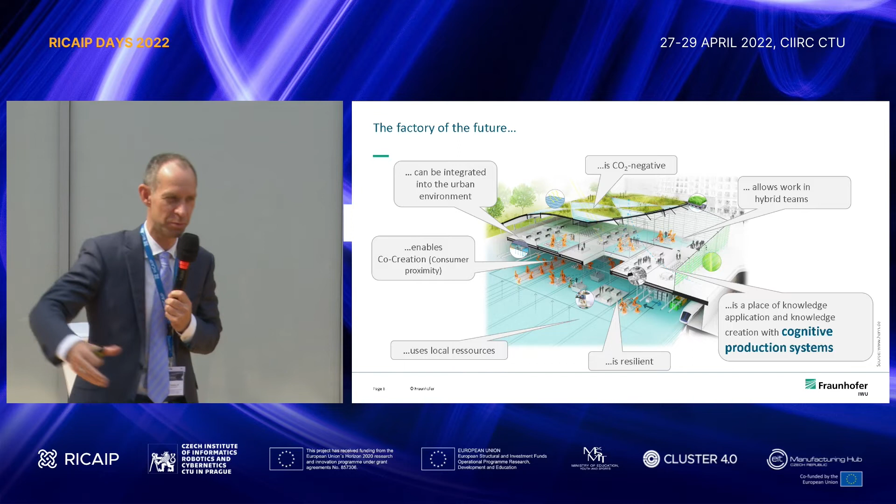The topic today is the factory of the future is not just producing products, they also produce knowledge. This is what we already talked about the whole day today, and that's why we call it cognitive production systems.

When we compare human beings and machine processes, we have lots of interactions and the same idea. So we have this self-reflection. We work in an efficient way. We want to do it independently, and of course we are able to adapt to changes in the process. This is what we have to link also to the production of the future.

So when we say how we can do this, what are the technical cognitive systems, we find lots of things. For example, we have to develop dialogue systems between human and machine. We need machine-readable self-optimization strategies. Of course, we need self-description, which we already have solved with, for example, AAS and so on. So some of the topics we already have done, some we have to develop in the future.

And so we have created an idea of human cyber-physical production systems. We have to combine the technical cognition and the knowledge from the worker, the knowledge from the developer of products. This is what we have to bring together in the next step. This could also be a part of the next 10-year topics.

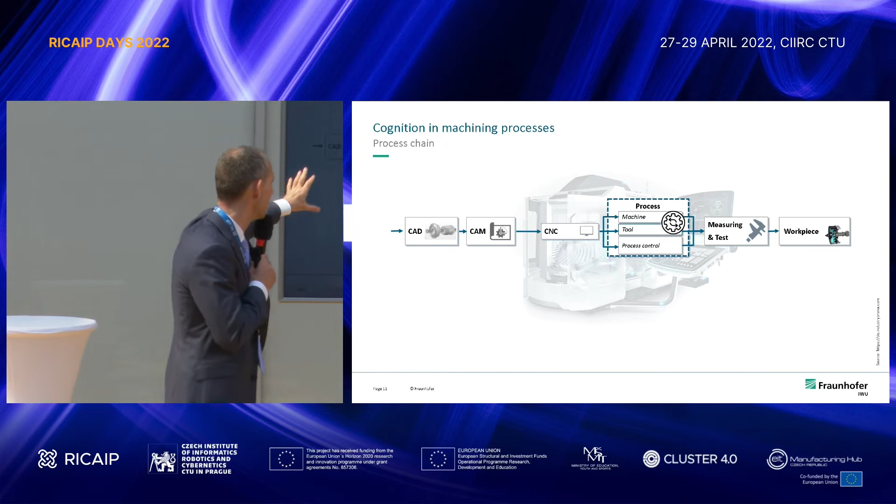And I want to show you some results, what we already solved in the process chain of machining processes. So normally we start with CAD, CAM system, CNC. We have the process with machine-process interaction. Then we have the measuring, and then we have the workpiece. This is the process chain we already have here.

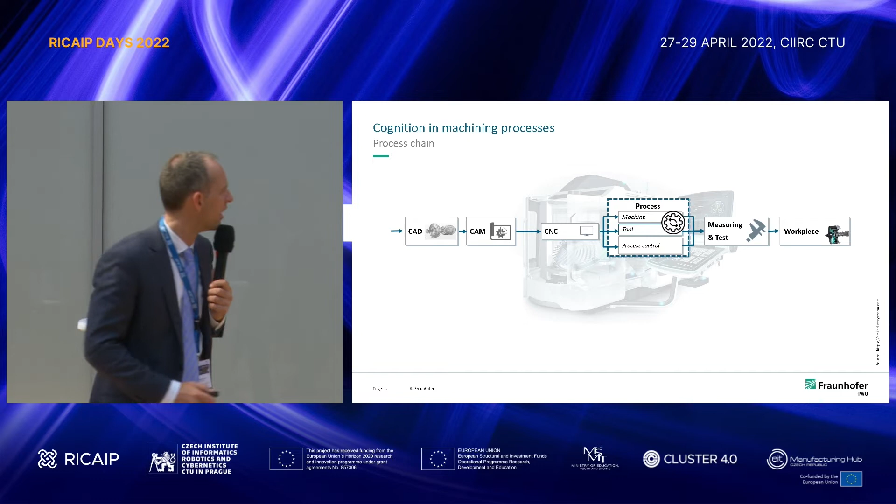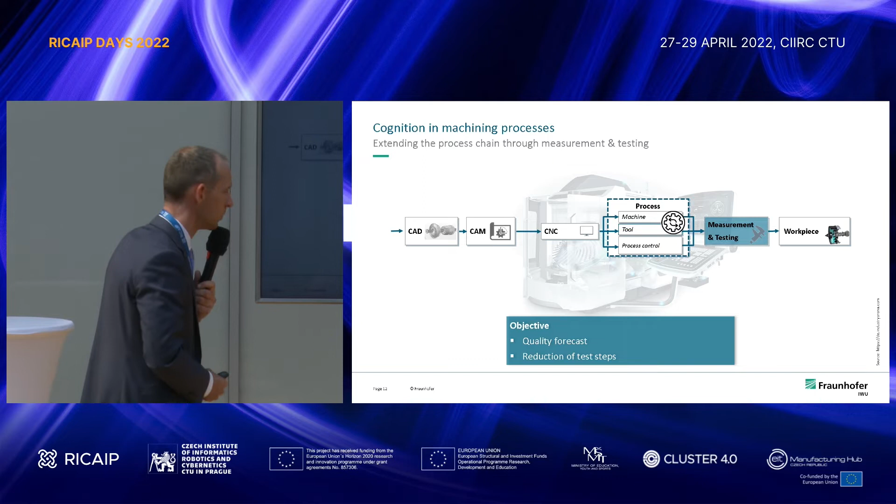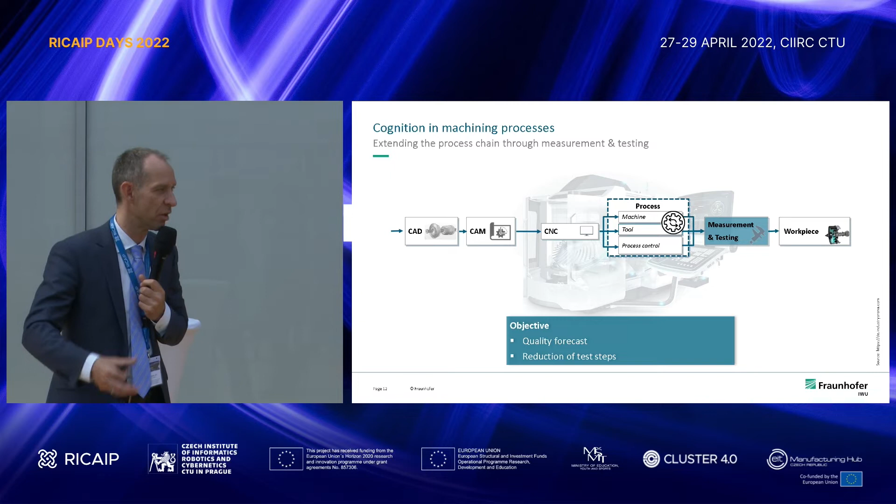And what we realize is, of course, a quality forecast when we want to close the loop. So we don't want to have a measurement device at each step. Sometimes it's good enough to have the sensory data and the knowledge, and then we can do a forecast for the quality, and this reduces also the effort.

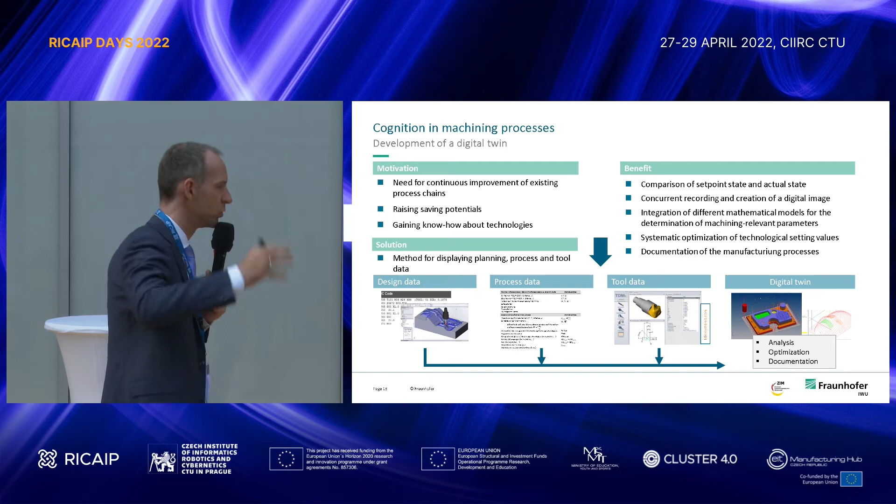For this, you know, there are different definitions of digital twins, and one is that we use the data from the machinery, combine this with physical models, and then we can predict the quality from the part. We are working on implementing this especially for serial production now, and in the future for single part production. This is what we are working on, and for this you need all the topics: which data you need, can you compress the data, which information you need from process planning, which information you need from logistics and so on - all this we have to match.

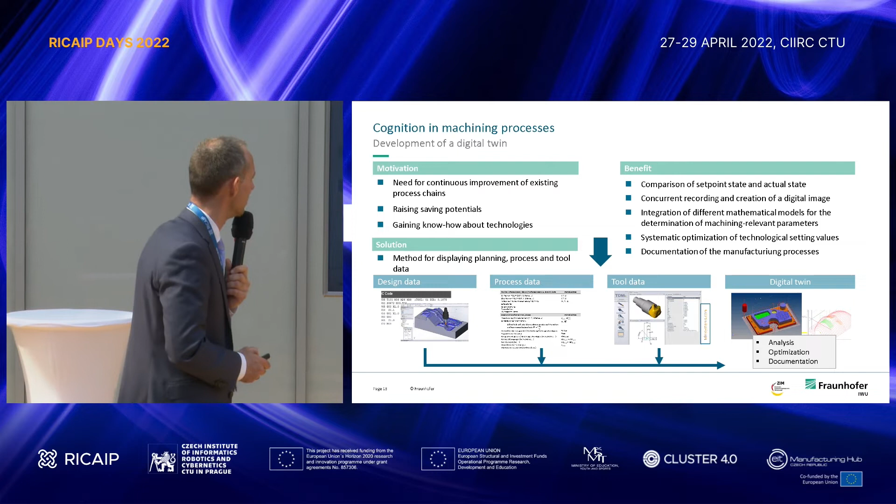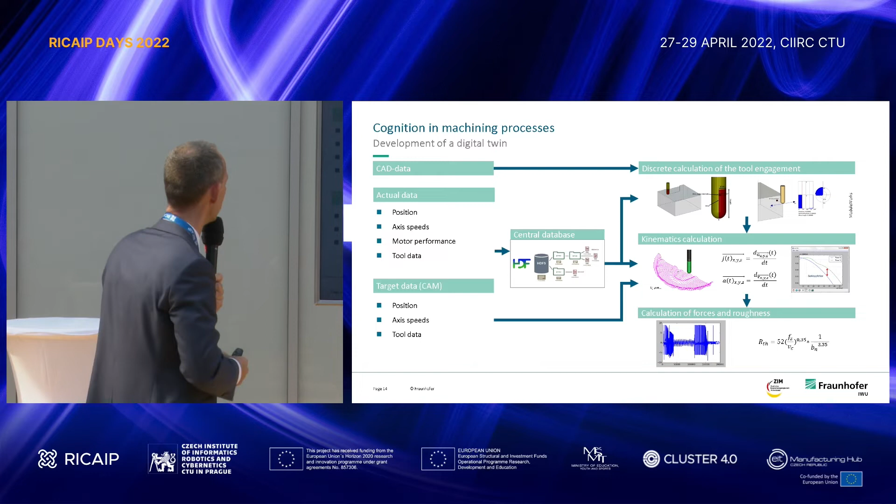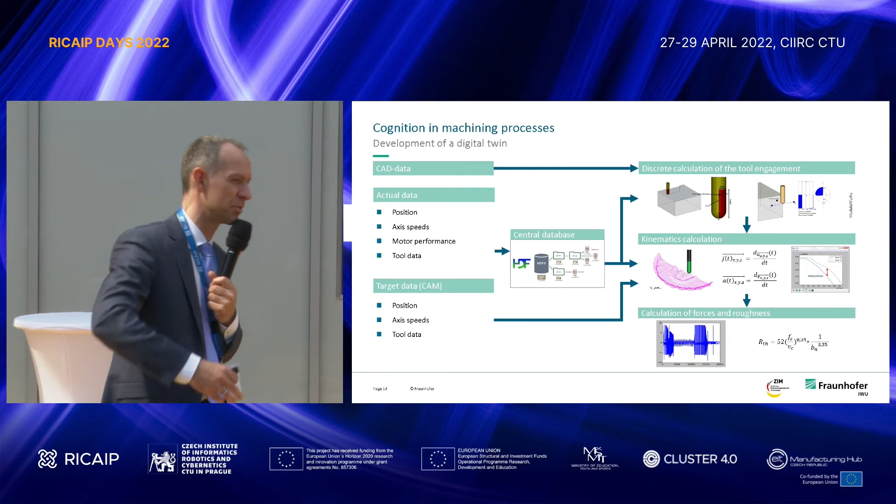And I think we have a longer presentation today from Albrecht Hänel later on. He will also show this concept here, how we use the database, which format we need, and how we extract - then together with the simulation - coming to the real physical digital twin.

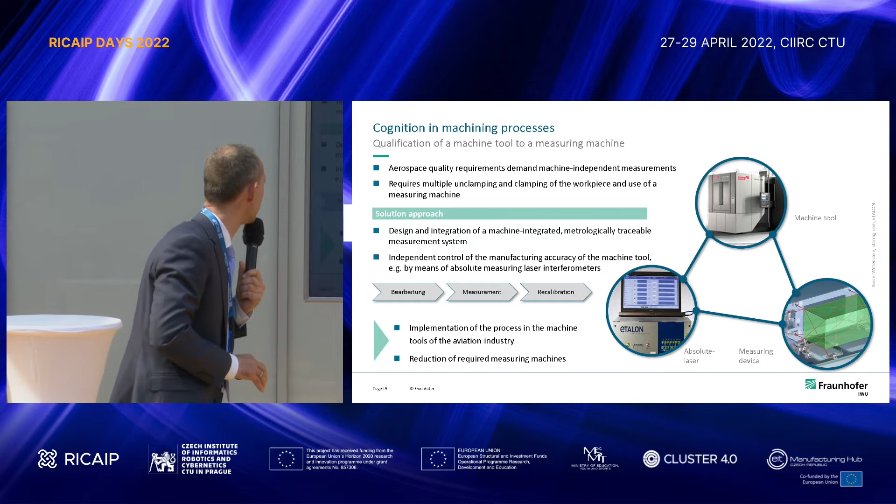And the next step, this is what we have done with the part of the process, the machine-process interaction. On the other hand, you have the machine itself. And so you have to qualify the machine, the cutting machine, to a measurement device.

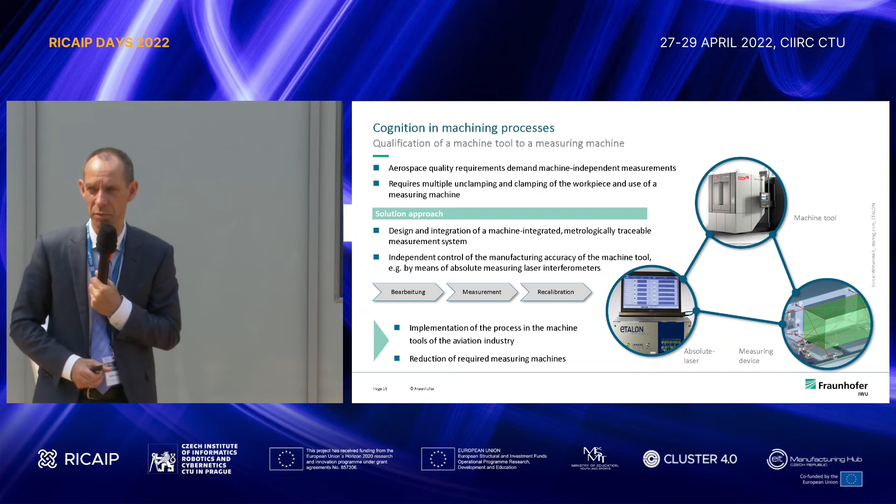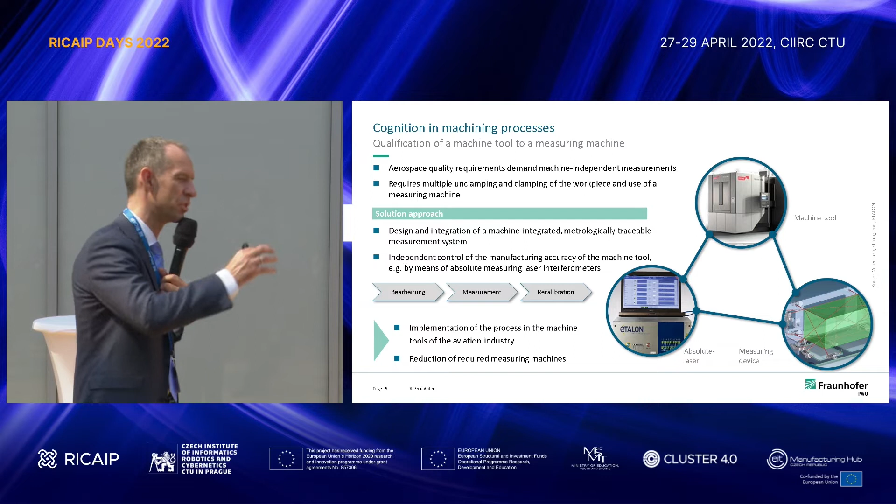So you need models, for example, for thermal behavior, for the dynamic, for the static behavior. Combine this with additional measurement devices, and so you have not just the deflection from the tool, you have also the deflection from the machine itself. And when you combine this, you can predict the quality. This is our approach, and I think we have to do a lot of work together.

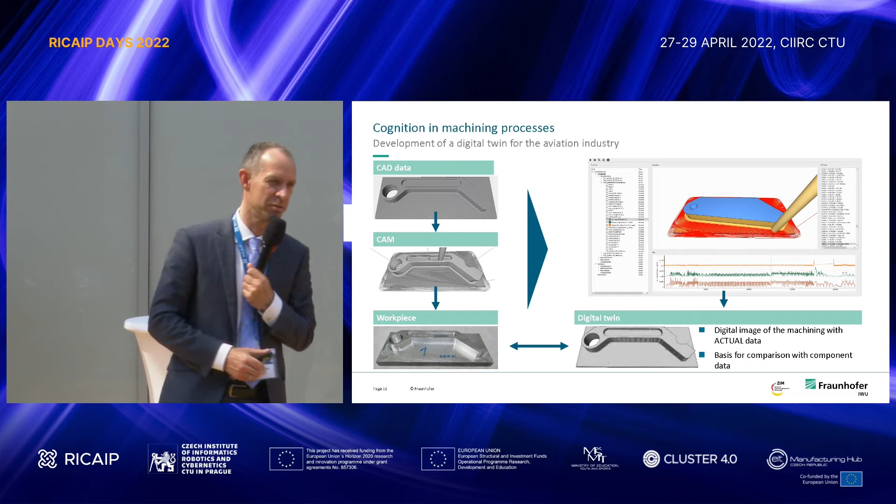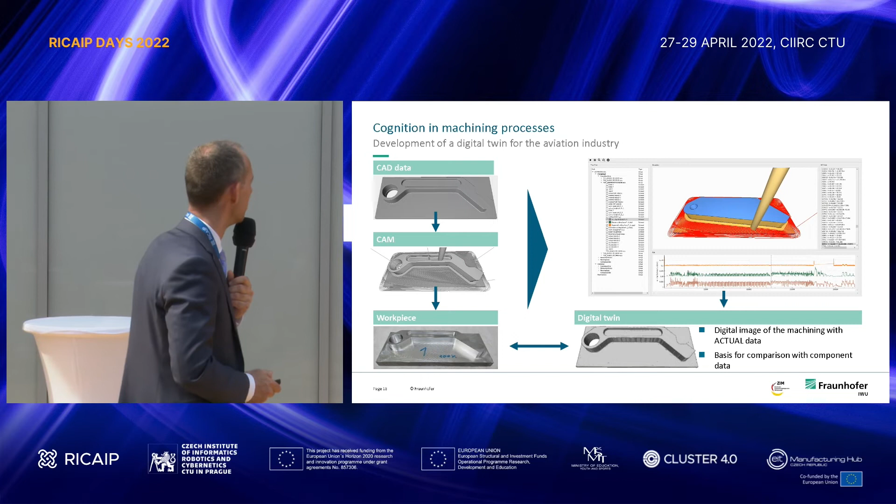So we are quite happy that we start now a project with Peter Higgesmeier together to implement this to BaSys 4.0, to the physical layer for the cutting processes. We are quite happy, and already we can see first results.

The next topic is how you can self-describe the machinery, and for this you need the self-diagnosis. One traditional approach is that you have some dry runs of the machine, collect the data, and do condition monitoring. But you not just use the condition monitoring for planning of taking the machine in a good shape,

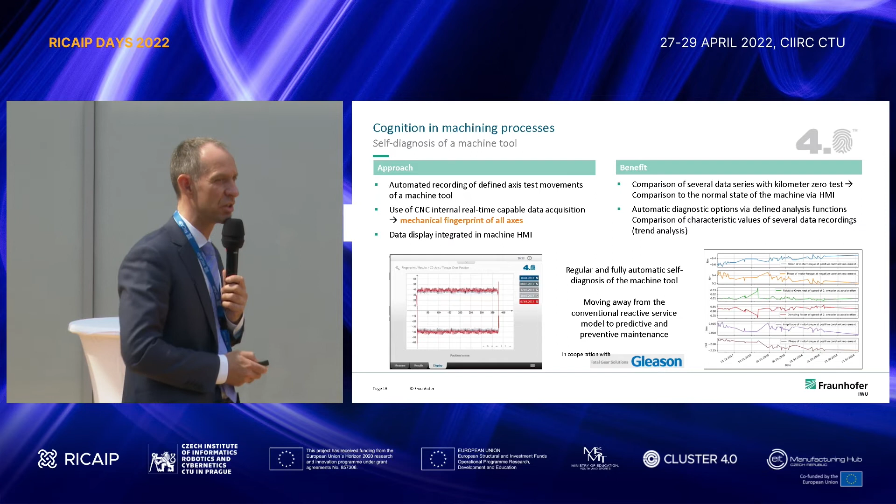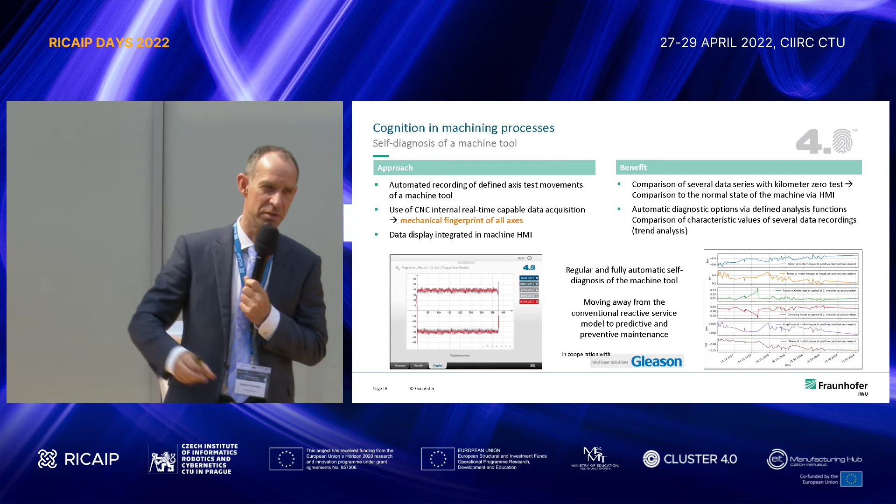but you have to use this information for self-description and for the machine process itself, and to run these tests not just with a trial run, so collect the data out of the process itself. Then you have to do the identification. Do you have enough excitation for the parameters you want to identify? And then you can use this information, and you have just one simple step in the process and use this for the data analysis.

And the next topic we work on is how we can integrate the knowledge from the machine tool user. And we have the topic of acoustic emission. So we run some tests with acoustic emission sensors, sitting together with all of the users of the machine in our test lab and asking them, is this a stable process, is it a good process or not, just from hearing, using their knowledge, and then we combine this with the acoustic emission.

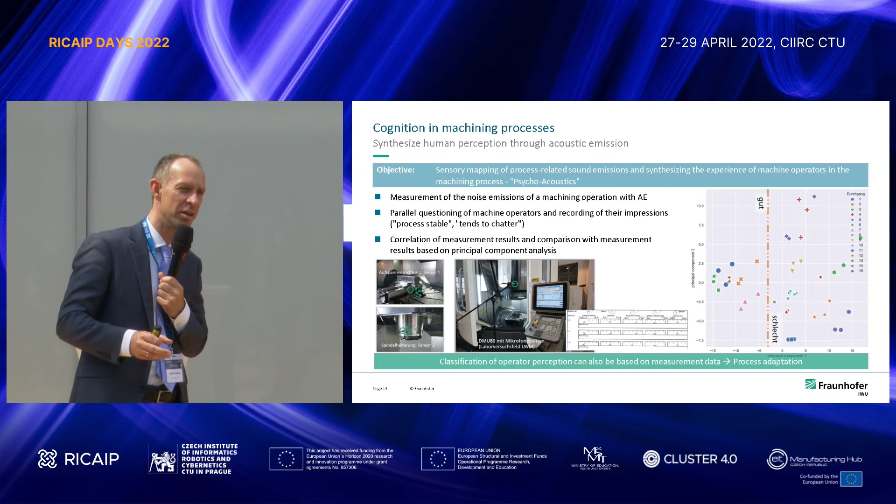And we bring this together, and there are some interesting results, but this is an ongoing topic now, how we can match this, how we can use this information as an assistance system for the machine tool users, and also to compress the data, because just some frequency range is relevant for the process itself, and that is what we can learn from the machine tool user.

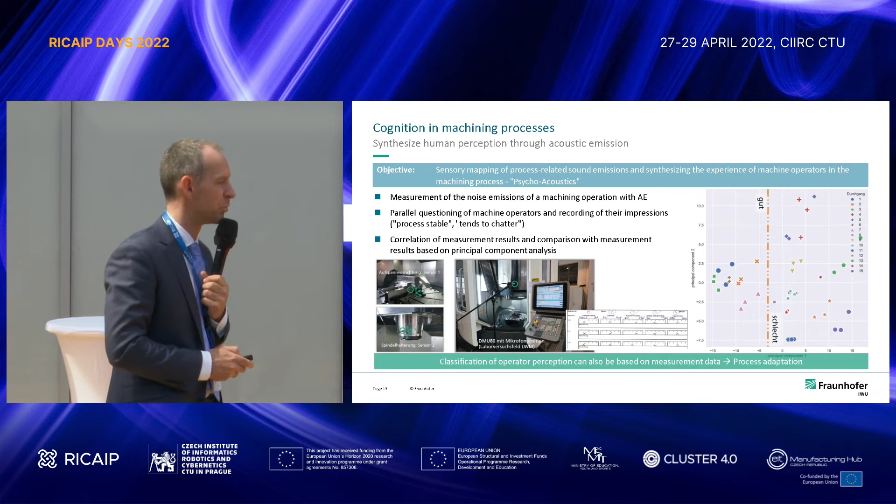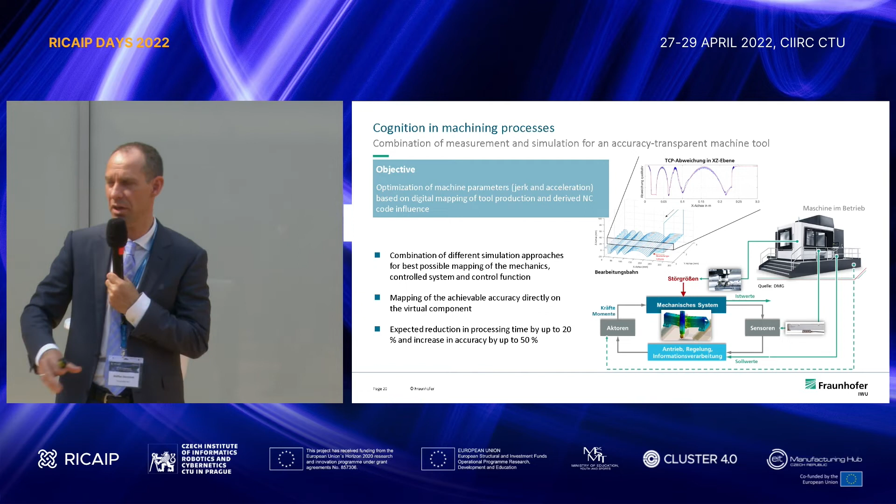And when we go not just into the quality prediction, but also into the description of the machine itself, we need models for a live simulation. So for this you need very fast simulation models, and you go from finite element models to model order reduction, so that we can model the behavior in real time, and then we can mix this with planning information from Industry 4.0 approaches. Then when we say we go to the shutdown, we have to calculate, for example, the thermal behavior.

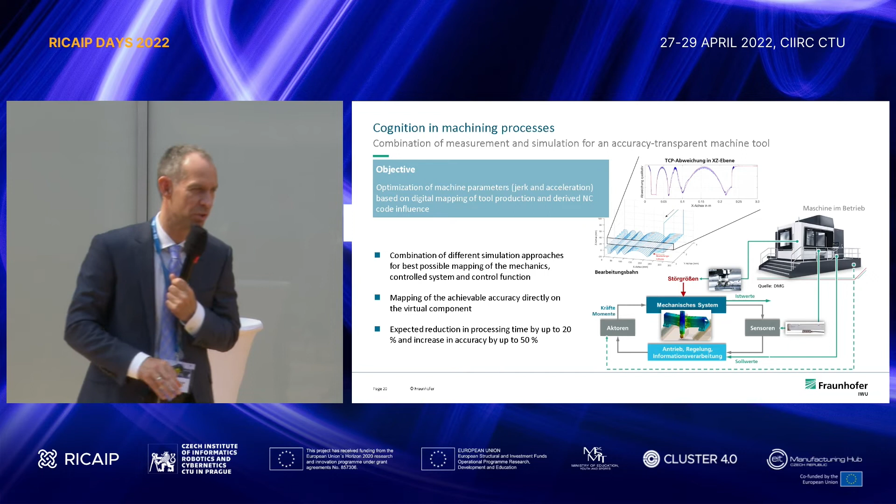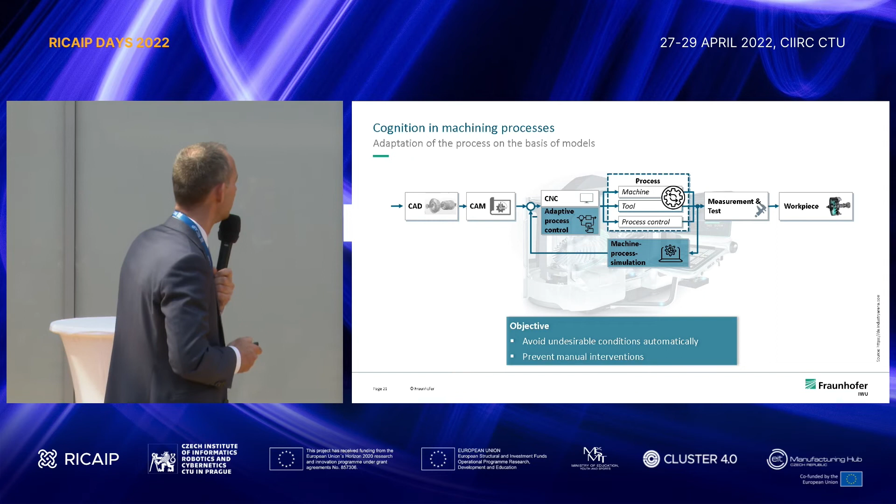Can we switch on the machine again after 10 minutes, or do you need longer than just switching on and warming up to have good quality? This is why we need the physical layer in the future. And then we have to adapt the process because of some changes. So we have uncertainties in the processes itself, lubrication and so on, and you have to deal with these problems.

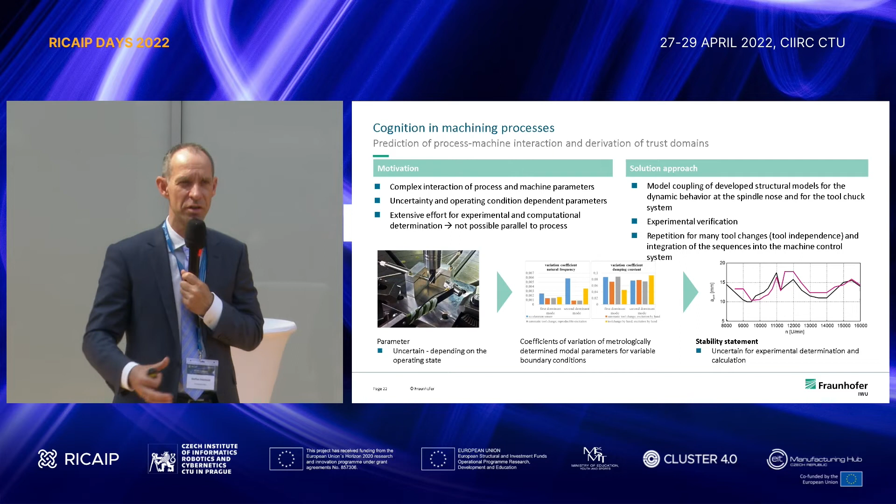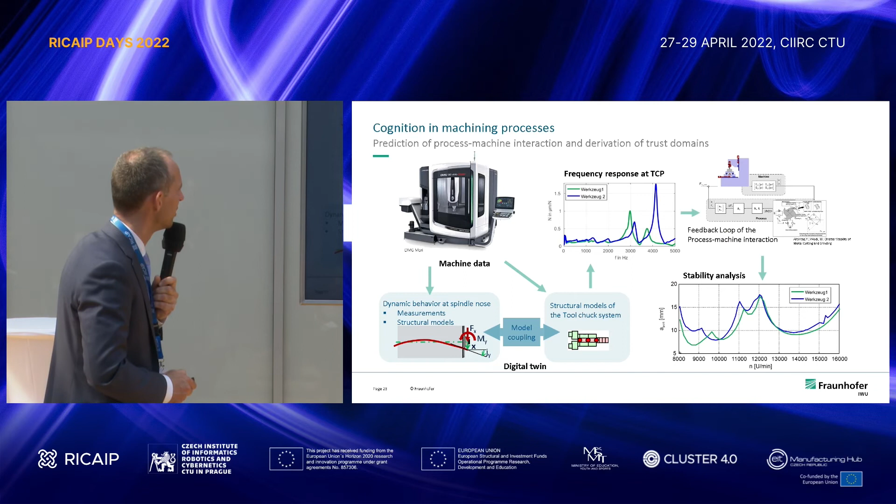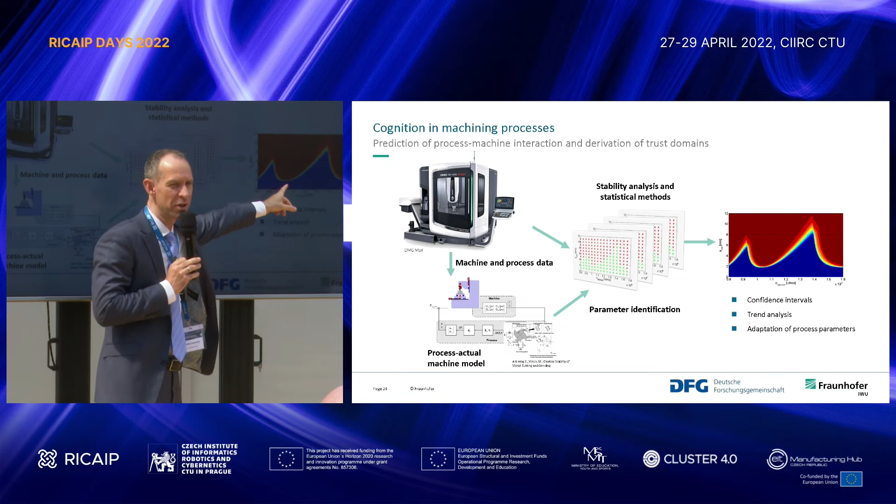One example is the stability, and you have lots of uncertain parameters in the stability prediction. And our approach was that we ran some simulations, so I jump directly into the result. So you have confidence intervals for your prediction, and this is exactly what you need when you live-adapt the process. You combine this with sensory information, and when you find out that you're in an unstable area and you have these confidence intervals, you can make the decision in which direction you have to adapt your process to go the fastest way into a stable area.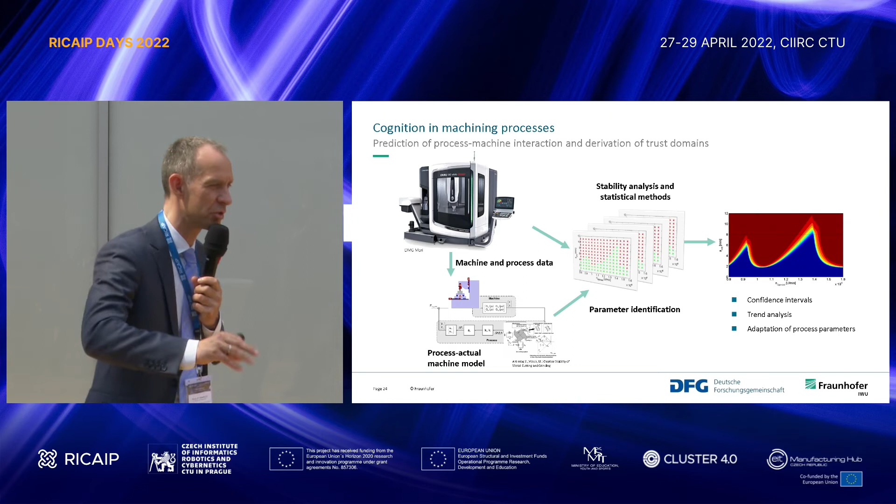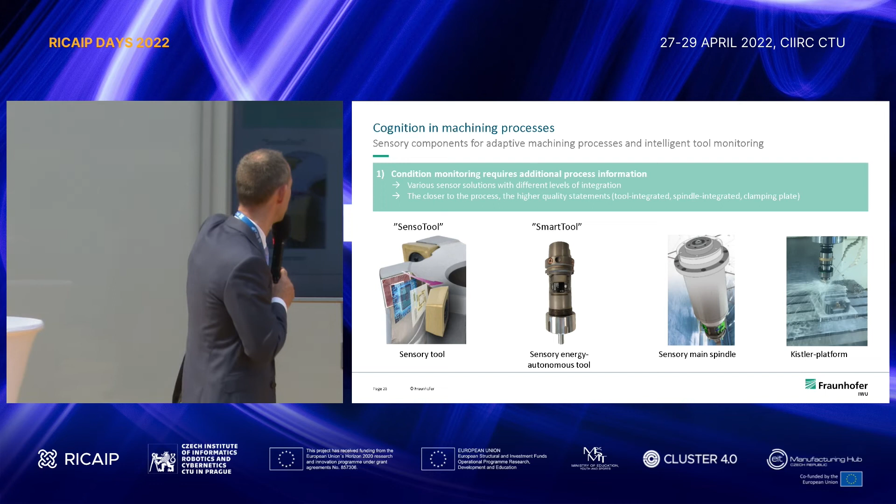This is why we have to do the combination with high performance computing and the topic of self-adaptation. A topic we address in our institute is to bring more sensors into the machine tool, and we start from the sensory tool directly at the cutting edge, to a smart tool, to a sensory spindle or a platform, and we make the decision which sensory is the right way for the process.

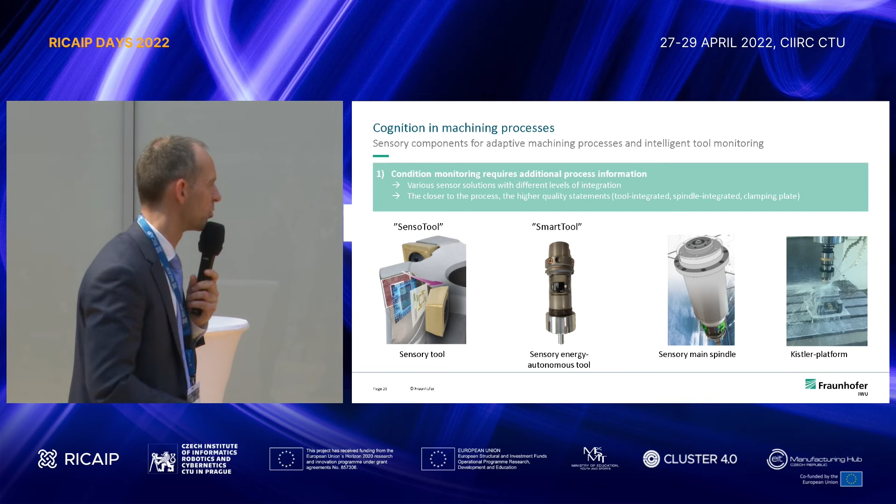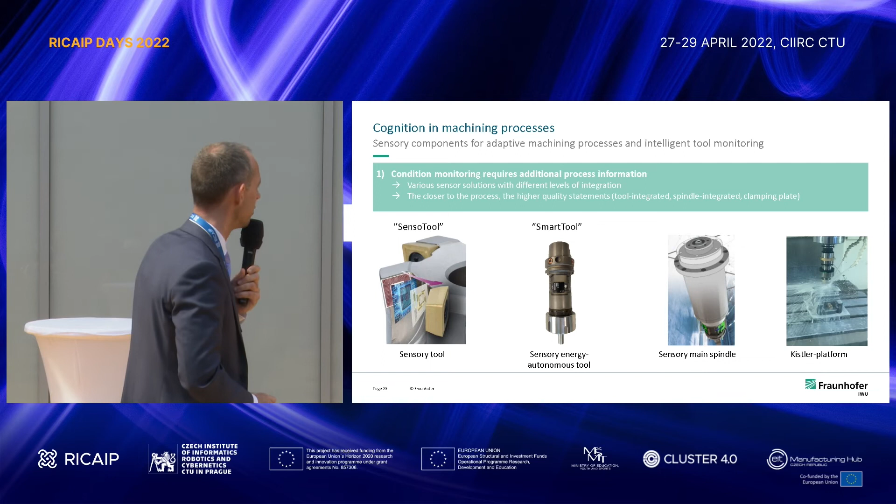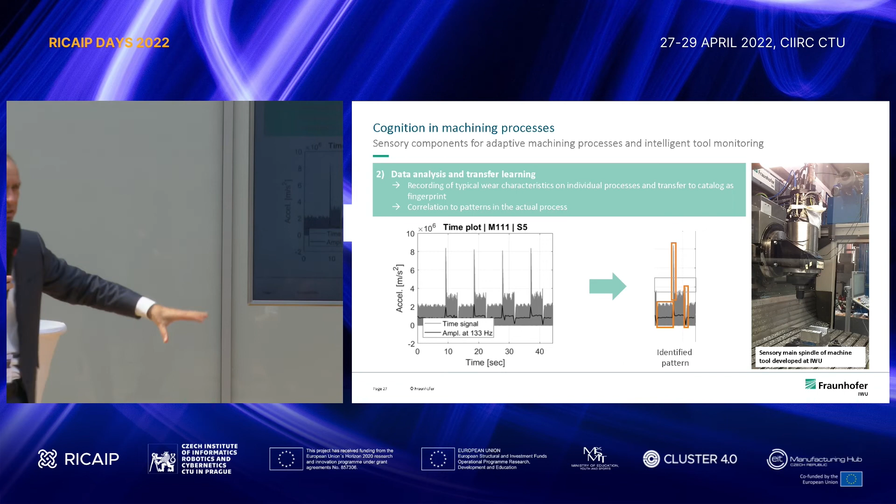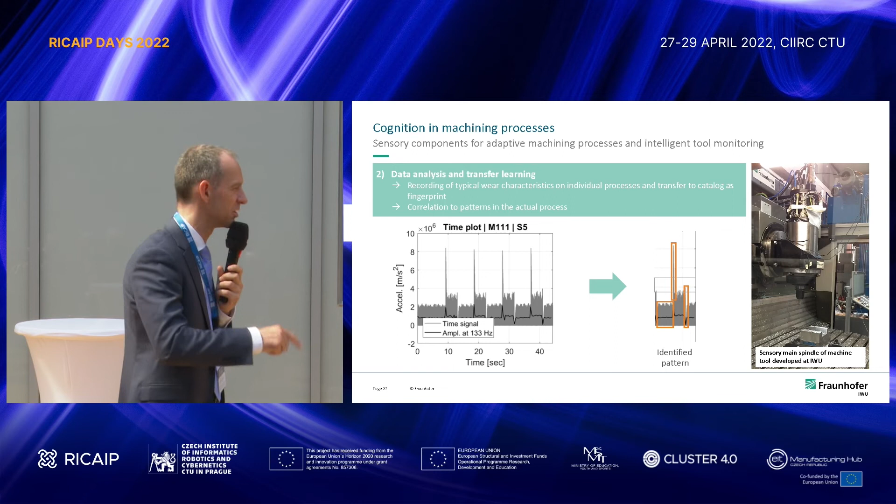This knowledge you need, and you need this case, so you need all this solution, and you need the knowledge to make the decision which is the right solution. For example, you have this information. This is not enough. At the end, you have to make the decision which sensor information is relevant for condition monitoring. Not all of the information is relevant, so you have to make the decision online and use just this information for the condition monitoring.

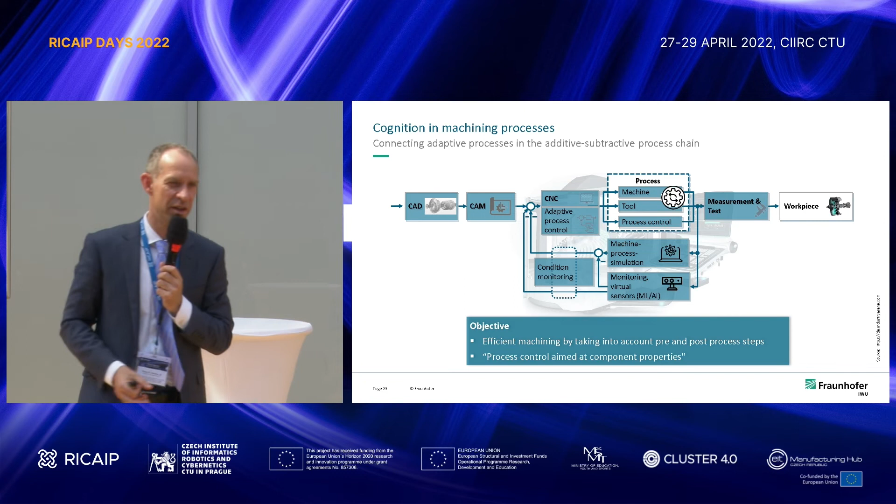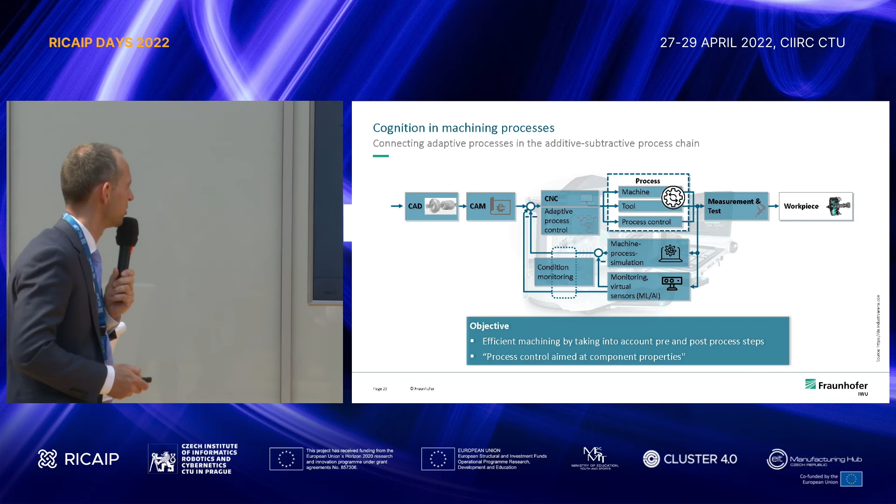And if you have this, you can automatically adapt your processes. And a final example where we already bring together all of this information was a really high-level product. This was for the space industry, a process of additive-subtractive machining. So you use an optical bench, and this is a really high-performance product, and we had to make the decision how we can realize that the first part is the right part, and for this you have to adapt your processes so that you can learn step by step in this process.

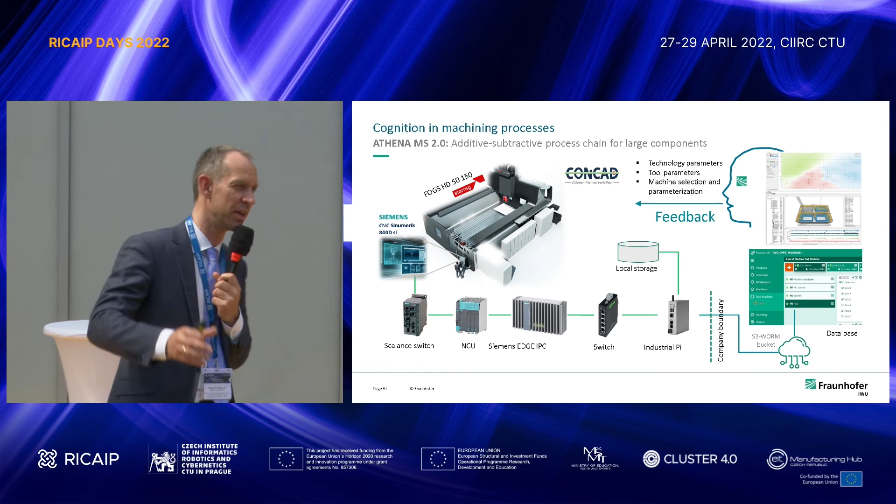How is the behavior of your machinery? How is the behavior of the material you're machining? What is the state of your tools? And with this, you can realize a first-time-right production. And all this we have connected with a large machine from Rhein at an SME company in Germany. So this is well equipped with all of the sensors from the machinery side. We have also adapted an edge device from Siemens, collecting the data and using this data online to adapt the process, and so we can realize this high-end product as a first-time-right product.

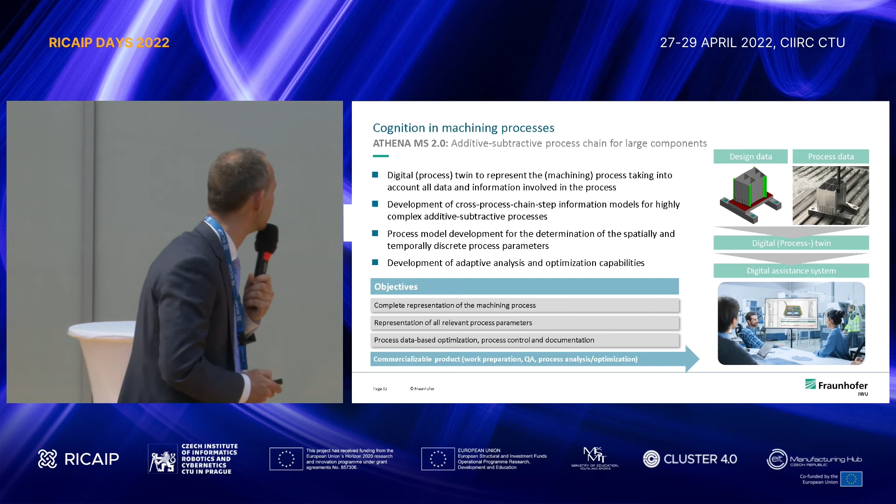When you look to the future, you heard about Athena. This is exactly this product. And now I want to switch to human-robot collaboration. You have the human skills, and you need technical skills, and you have to bring this together in the right way. And we have seen it at the coffee bar: the right way is that you have hybrid teams. Not just a fully automated system, you need a hybrid system, because at the end you have someone who can solve problems you did not have in mind at the beginning, and for this you need this collaboration.

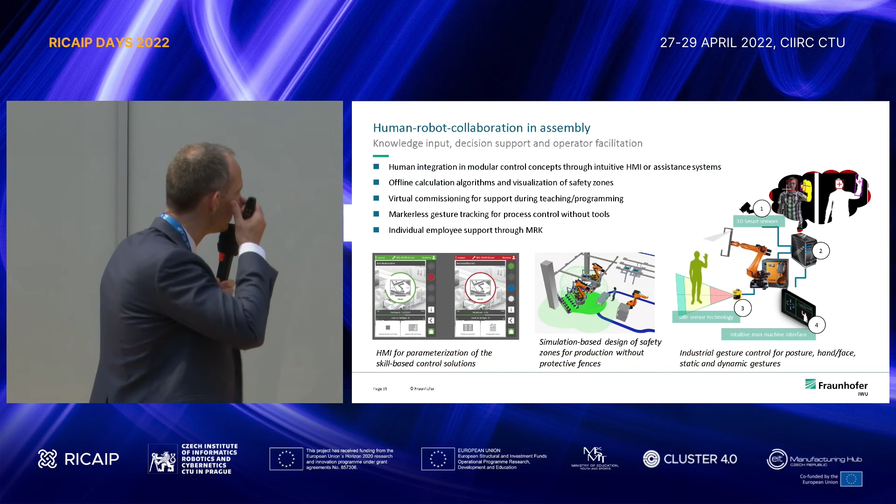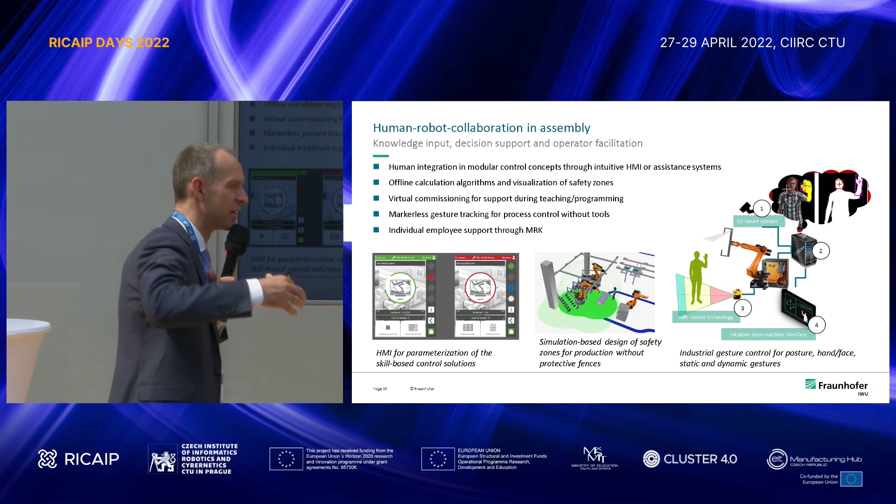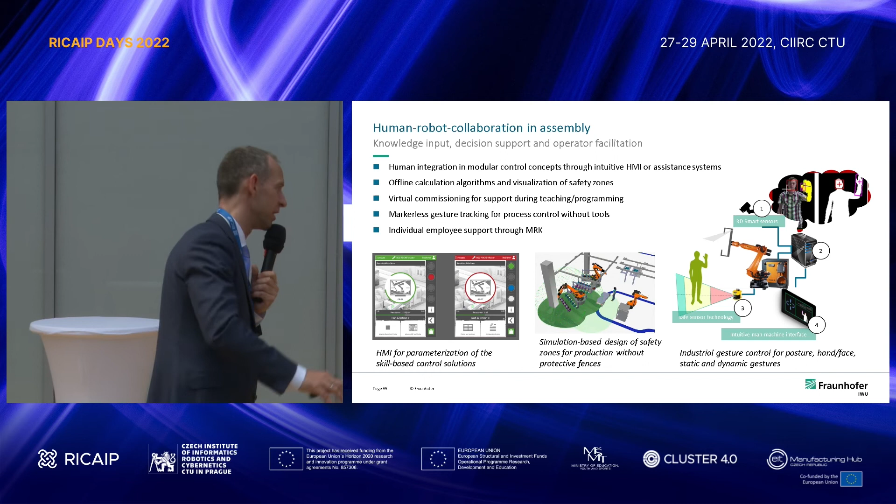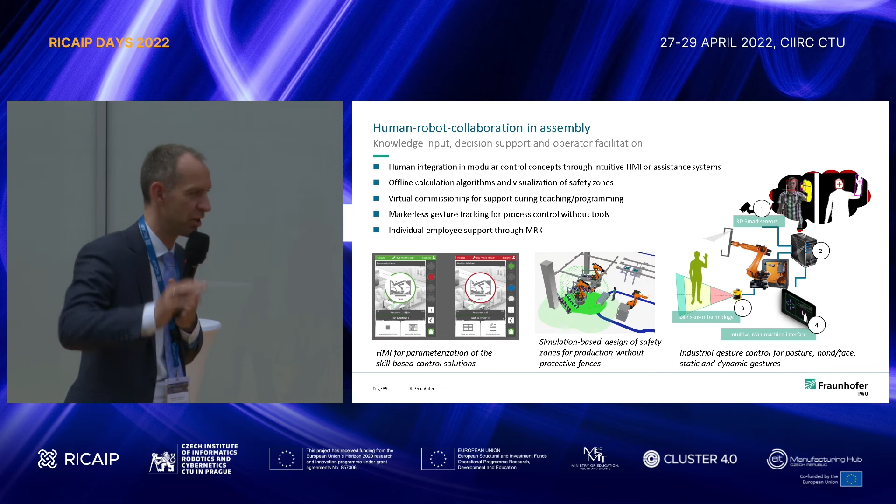And for this collaboration you need, not just for lightweight robots but also for heavy robots, online safety zones. And we have developed a system for online adaptation of the safety zones, and so we can increase the speed. This is the topic. The topic is not just to have a safe solution. You need a safe and efficient solution. And for this, we already have a solution.

Another solution was an industrial gesture system for machine-human interaction. We have realized it together with lots of companies here in Germany, and so we can communicate with the machine with real, normal human gestures. This is also a topic.

They stopped my presentation because I am running out of time. They stopped the... Yes, could you?

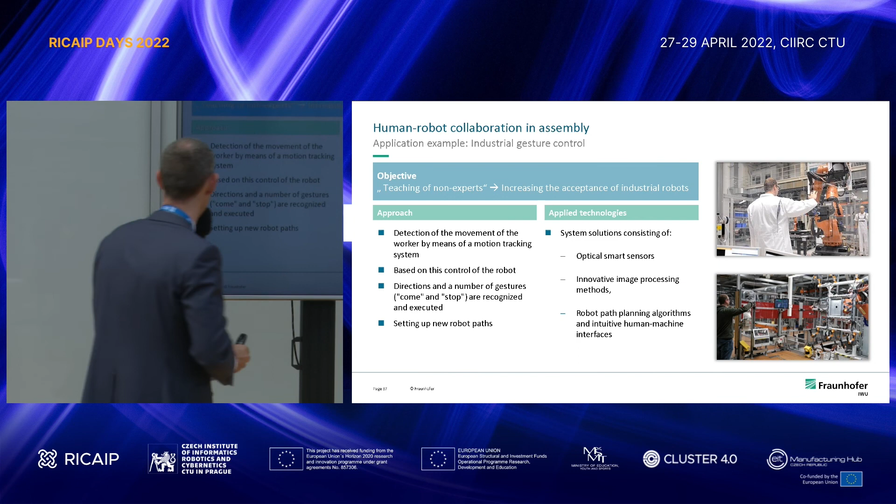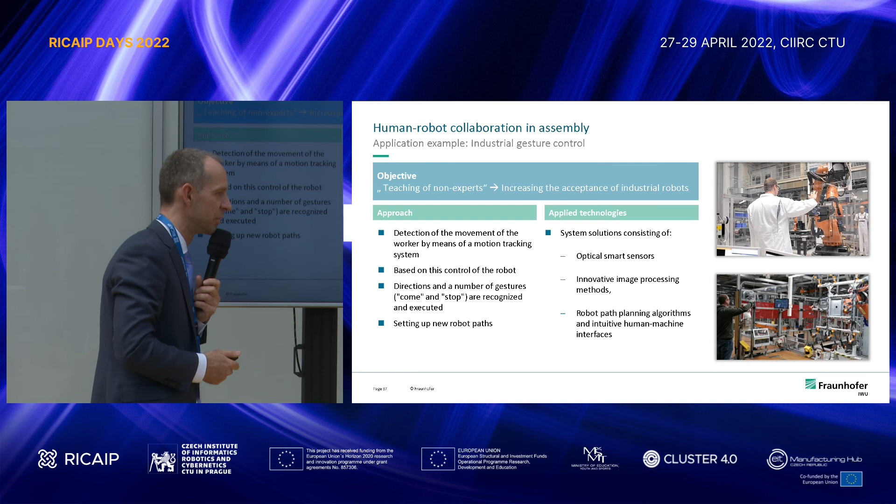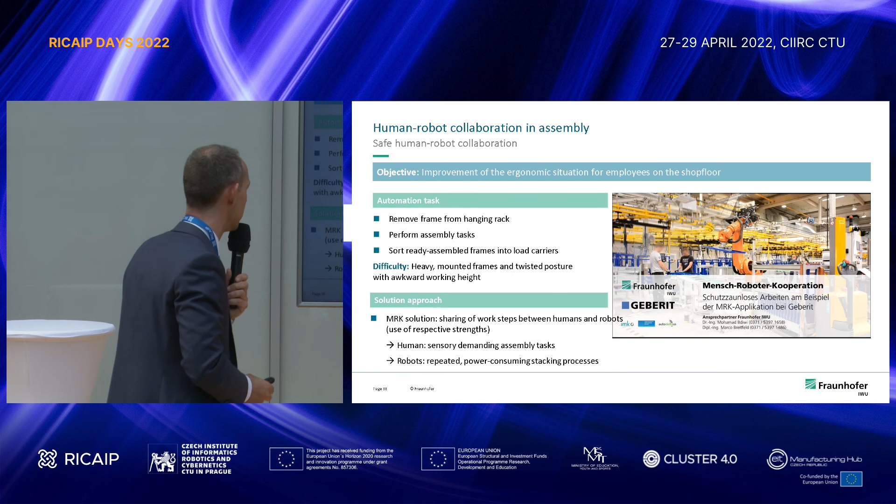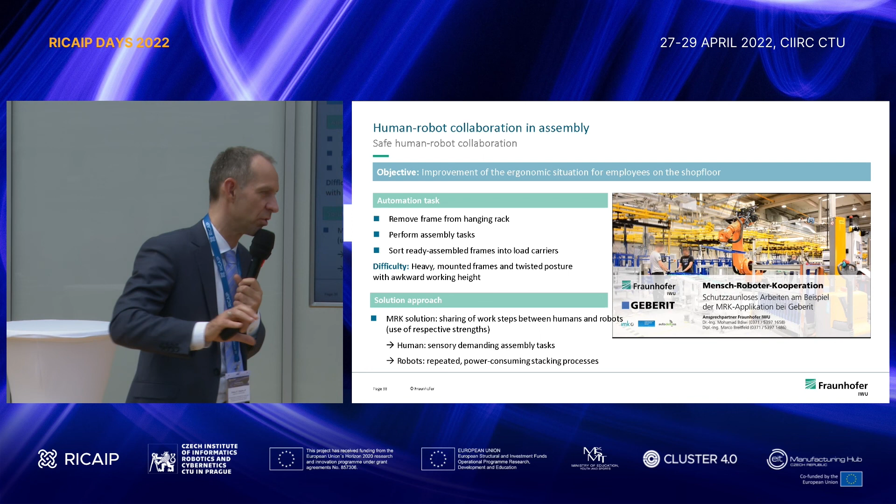We also work together with Volkswagen. This is an example where we teach robots just by human actions, and this solution already runs there. We have also optimized this topic. Often the main topic is that we have an application and we have to analyze it. Is it better to have this human-machine interaction, or do you have a fence? And then you have to optimize the times.

And this brings me to the end of my presentation. Maybe in 2 or 3 years we will have an opening ceremony. We have a Center for Cognitive Production Systems planned in Dresden, so that's why we can really collaborate. So in 3 years we can open it, and in the meantime we can collaborate with the 5G lab in Dresden and so on. I think these are really good connections, and now we can start with this.